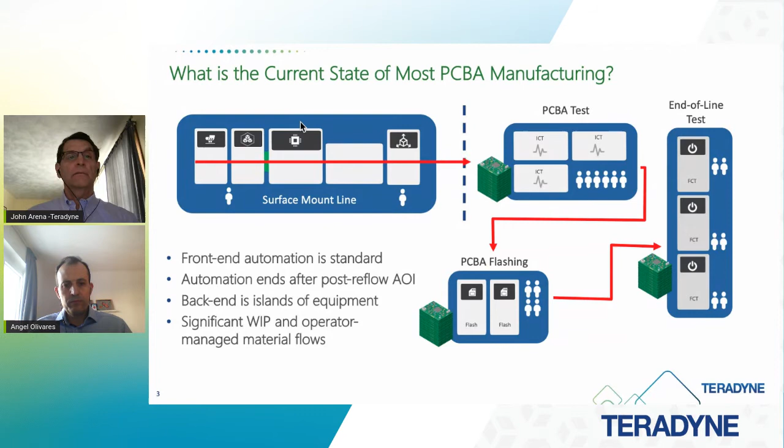The future state of productivity in PCBA manufacturing is to automate more of the back-end process, including the production test and the assembly stages that follow it, so that the entirety of the front end is largely on automation and largely without the need for constant human interaction. The function of the islands becomes integrated into the line. This, of course, is managed by line-to-line communication via SMEMA or other protocols, which I'll talk about in a moment.

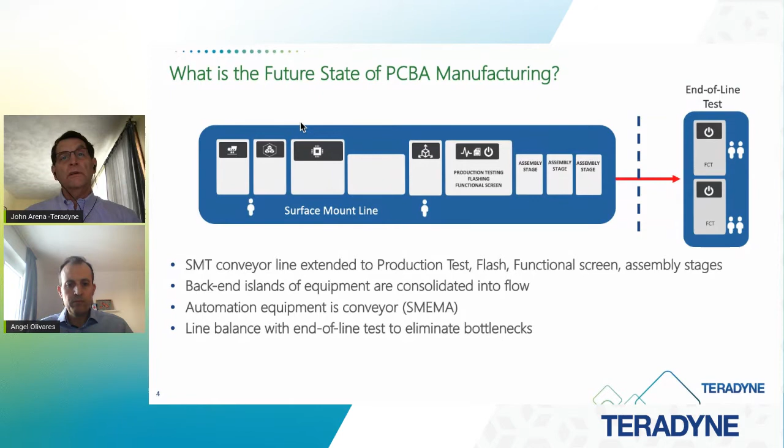And the other advantage of this is a better line balance. So when you have islands of productivity, each of those works at their own rate. It's very easy to create a bottleneck where one is slower than the other and you have work piling up. With the automated concept, the entire line is optimized for full productivity, guaranteeing more machine utilization, more units per hour.

So what I'd like to do is go through some of the observations we have made and some of the questions we receive when we talk to customers about this future vision of automation. The first is that, well, I have work cells, that's true. They work very well. Yeah, there are problems with people and work buffers and so forth. But that becomes very hard to automate. How do I possibly automate a work cell?

Well, the first is to realize that there are disadvantages to the work cell. You have the work being divided among multiple groups, and all of them must cooperate to get the units per hour. In addition, work cells are very manual centric. In each of those manual steps, whether it's equipment placement, tooling placement, board handling, barcoding, and so forth, all of those are done in series, and they all contribute to an increased takt time, the time per board, or the cycle time of the transaction.

The slower operator has a longer takt time, lower units per hour. So the focus of improving the work cell also goes to improving the overall operator investment in time by removing it. We remove the operator's contribution to takt time and thereby improve productivity.

And lastly, pardon me for the phone.

Lastly, each of the work cells has a buffer in front to guarantee that product is flowing nicely across each of the work cells. All of that can be eliminated in the automation stage, and that provides the increased units per hour and the increased productivity by assuring that there's no buildup of unprocessed customer equipment at any point in the flow.

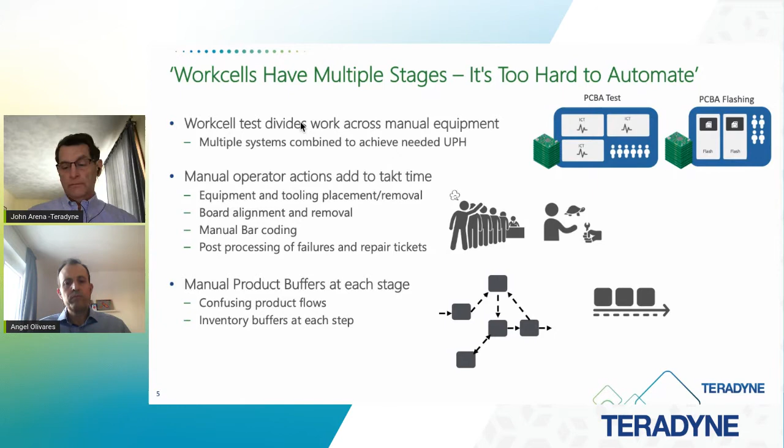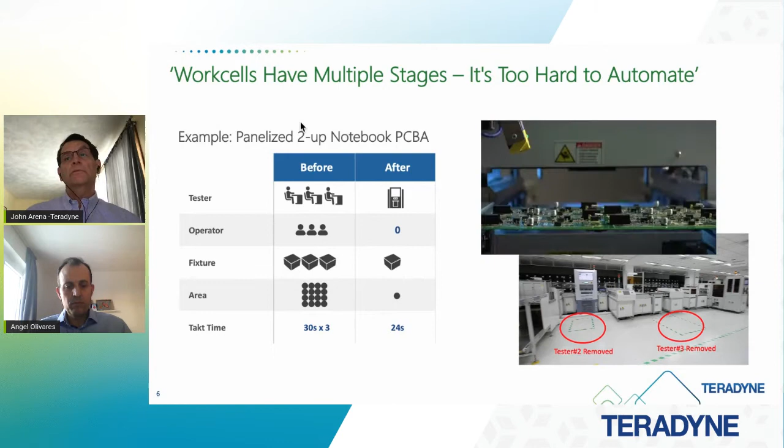Here's an example of such an improvement. So here we have a production environment. This is a real example. A customer previously had a work cell of 3 machines, was looking to add an additional machine to improve productivity of the work cell. And by putting a single automation system and the improvements I described earlier, we were able to duplicate the function of 3 testers with still some reserve, eliminate the number of operators, reduce the amount of tooling, and you see the reduction in work cell area.

This is a completely automated process, and the product flow continues into additional automated equipment that follows. By doing all this, we were still able to improve the takt time from a total of almost 90 seconds to 24 seconds. So the automation, the improvements I described earlier, dramatically improve the overall takt time of the process.

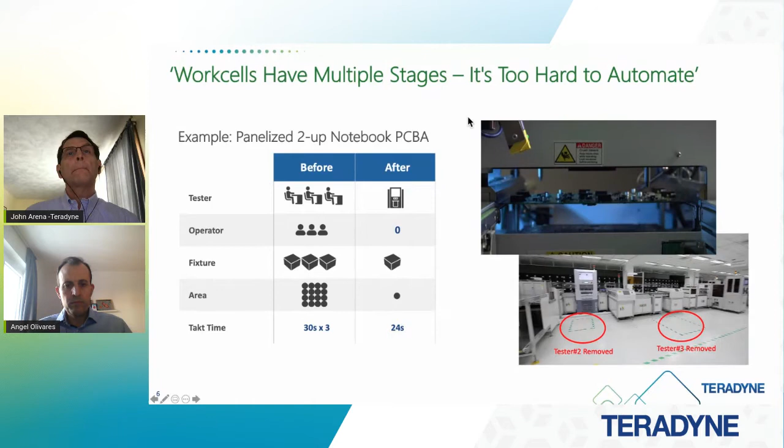A common complaint or a common observation is that the work cell processes are manual, and that includes manual documentation, paper, repair tags, and so forth. The manual system is storing test data locally. A printer is producing a kind of work ticket. This ticket is used by the next stage to inform them as to what steps to be done. There's some ability to recover that data by the operator, but it's cumbersome. And maybe some ability to report the defect data to the enterprise, but it's often one way. There's no way for the enterprise to then ask for changes in the way MES is recorded.

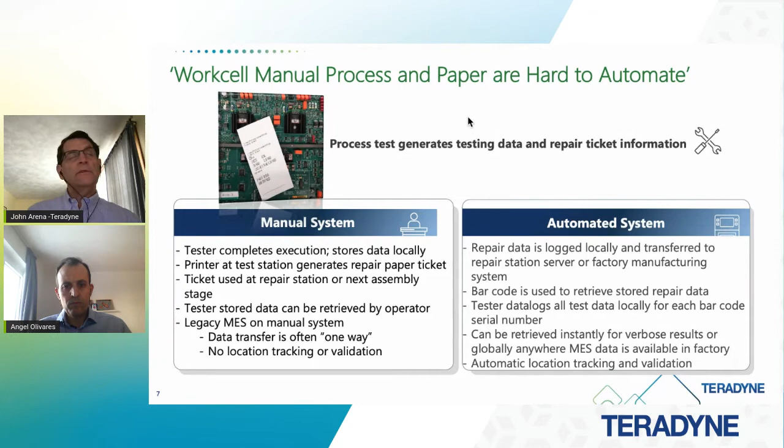The automated systems handle all of that paper process automatically without any need of the operator to go collect the data or print anything. It's all electronically transferred. All of the data is indexed by barcodes, so the repair information can be located by simply identifying the barcode of the product. Each of the verbose test results are available, and it can be located anywhere in the factory or the world. So you have automatic asset tracking for the repair process and production steps. These are commonly used functions today that exist without any special handling.

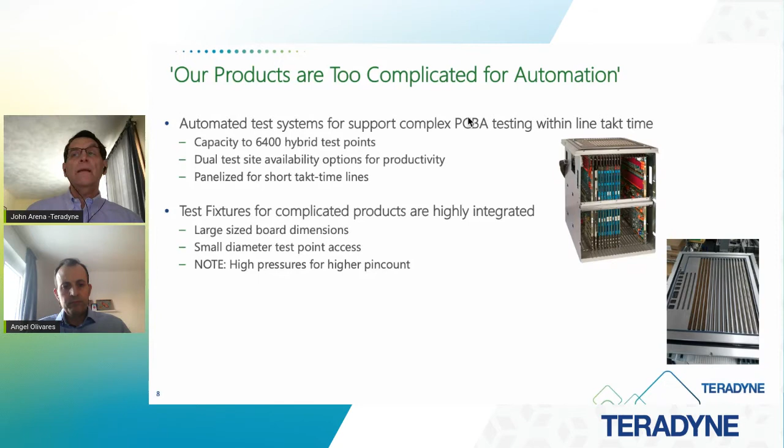Another common complaint is complexity. My product is very complex. It's not really an automation target. Well, these days, automation can extend well into 6,000 or greater number of test points. You have the ability to use multiple engines or multiple sites to produce even higher units per hour, focused on very short takt time products. And the concept of a test fixture has changed as well. They're far more integrated, far more capable than the test fixtures of even 5 or 10 years ago.

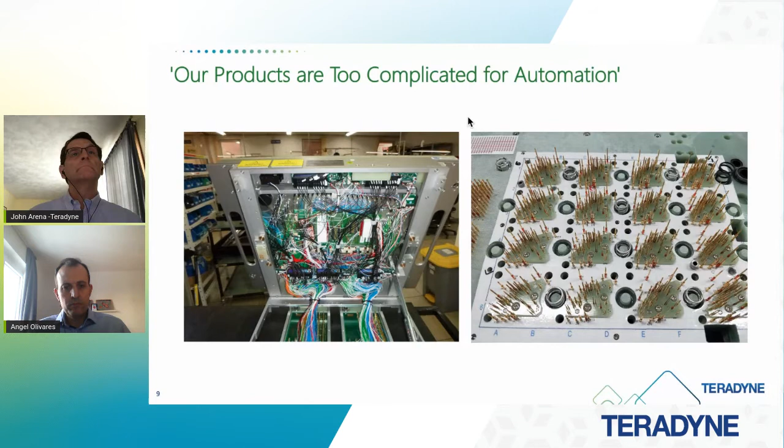We also get the opposite complaint. The products are too small. The volume is not great enough. It's high mix, low volume. It's not really an opportunity to talk about automation. Well, there are other alternatives besides a straight inline solution.

6-axis robots, automated robotics, are easily deployed for board handling. They can address the movement of an irregular product from the buffer to the tester and back. Modern testers have built-in robotics control so that the management of the robot, the location of the robot, the control of it is all managed by the tester. And these are, again, fairly common solutions now.

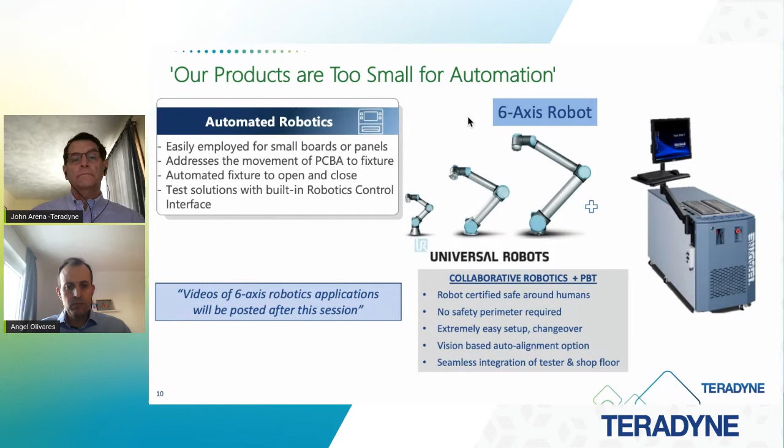The physical size of the product is often a complaint. The product is simply too large, it's too big, it's too wide. It's not uncommon to find automation solutions that can handle products that are 1/2 meter by 1/2 meter or even larger.

When you consider that such a fixture is big, of course, but it can also usually be smaller and lighter than a manual system, because the function of the manual fixture includes a press function, pneumatics or some sort of pressing. That is eliminated with an automated fixture. So the fixtures in that regard can be simplified. And there are several hundred examples of this kind of large board automation in the world today, both from Teradyne and our competitors. So board size is usually not an issue.

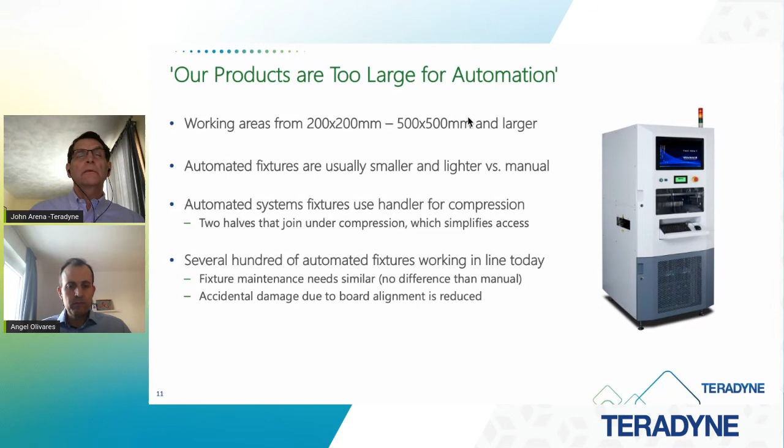As I mentioned earlier, there are many solutions in the world today, and the opportunity to pick automation as a component of the solution exists. So these are several vendors that Teradyne is familiar with working with commonly. You see the range from relatively small to relatively large. These are all examples of automation in which multiple kinds of testing, function test, flashing, full in-circuit test can all be performed quite easily, no matter what the product size. So the choice of automation can be optimized for the product, separate from the choice of test, and the two can be merged into a common platform.

Looking somewhat closer at the tester on the right of your screen, the larger product there with the Baumann name, this is actually a full multi-cell robotic controlled solution where product comes in on a conveyor. It is taken from the input conveyor. It is processed to one of 6 contacting stations where a variety of testing is processed. So these are 6 different or 4 different or 5 different kinds of value-added processing. And the product is moved from A to B to C as the test flow requires. But all of this is contained within a completely customized work cell that's targeted at this customer's application, all managed by a 6-axis robot at the core.

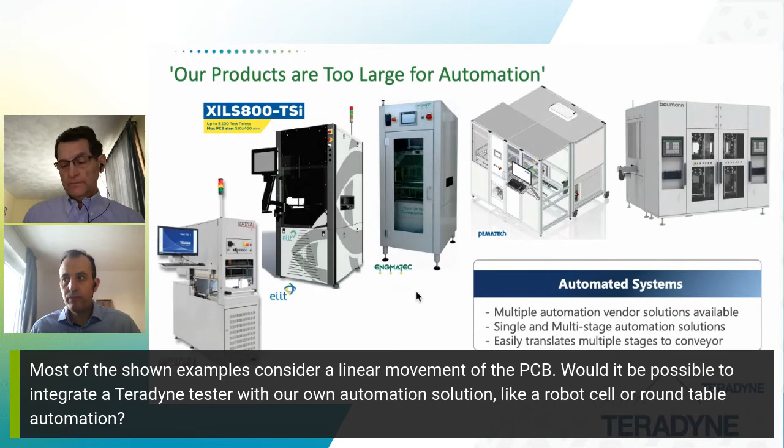Following this question, there is something related. Is it possible for Teradyne to upgrade existing obsolete test solutions that are integrated in an automation solution without replacing the whole automation solution or having to rebuild all fixtures? I think here they are referring to existing automation using other ICT suppliers that maybe are out of the market or they want to change for some reason, and customers are interested to reuse all the investment in fixtures.

Yeah, I did not bring slides to discuss this particularly, but usually that is the case for an older machine, an older test solution that is obsolete or not as productive as it should be. The Teradyne solution is extremely small. It can fit into just about every piece of automation, and because it is a full in-circuit test, it can usually duplicate entirely the testing function of earlier generation test solutions, no matter what the brand. So we have done this a couple of times now. This preserves the fixture. It preserves the test flow in the program. We will usually regenerate the program and match the test flow, but it's quite easy to do.

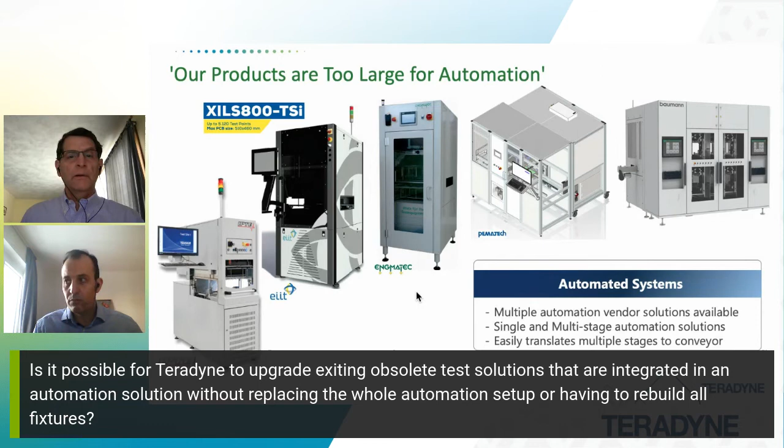Okay. Another question we get commonly is, how do I connect my automation solution to the enterprise? The work cell is hard enough to connect. How do I possibly connect the automation? Well, if you have a work cell based solution, you realize you're dealing with, as I said earlier, usually a printer output or maybe a local kind of data log file that has to be post-processed to connect to the enterprise. These post-processing tools are not standard.

They must be developed. There's generally not a way to connect the work cell to other machines in the line for machine-to-machine communication. There's very little real-time control usually available, and there's no way to record the calibration or maintenance state of the manual system in an automated way.

The modern automation systems have built-in capability to communicate the control, allow control of the machine, communicate the status of the machine, or to report the test results or calibration results. It's natural for the automated machine to provide this data because we don't have an operator standing by. So all of this capability is produced for the enterprise to monitor.

These are usually available as standard plugins or even product that we have on the shelf. You have the ability to monitor temperature, hours of operation, calibration status, anywhere in the enterprise. And this is real-time information that is produced second by second on the machine.

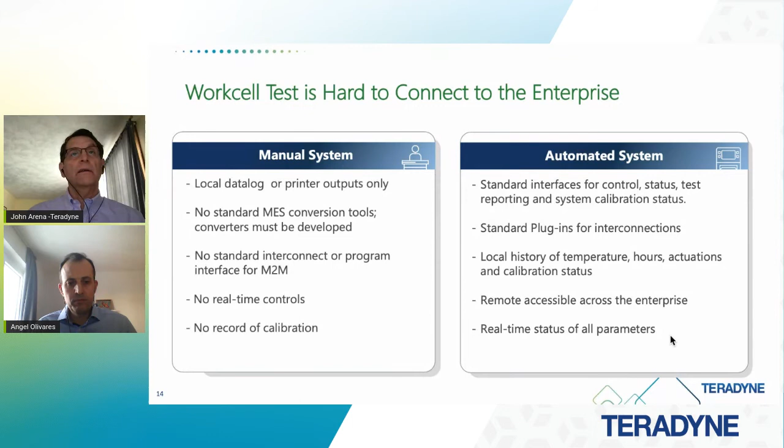One example of that is a product that we are rolling out now. We call it Smart4Metrics. Here we have a way to connect all of the machines on the floor via both an operator interface to interrogate the machine for its current state, its current calibration, its current production status, as well as connect real-time those machines to

implement machine-to-machine communication. So we have both a real-time interface and the web interface for the operator to provide that functionality. And these are developed to work with almost any existing connection on the line. We use a series of standard tools that we've developed as well as plugins that can be developed for proprietary interfaces. In this way, the machine is made to be completely in control of the factory and completely aware to the enterprise.

Sorry, John, I have another question here. Yes. Does Teradyne already have a solution to integrate the software with MES systems like ITAC, SAP, or new standards like IPC-CFX? Yeah, good question.

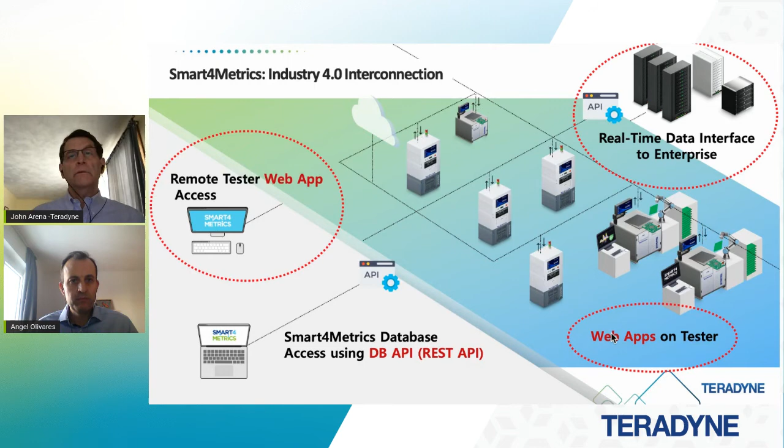So ITAC and other MES standards, historical standards, have for a long time been supported by custom solutions. Teradyne is still supporting these, but for new functions like IPC-CFX or Hermes, we are moving to this kind of plug-in concept where we have a standard interface on the testers, a series of plugins that are pre-written that integrate the tester to the desired MES system. So it's not a problem at all.

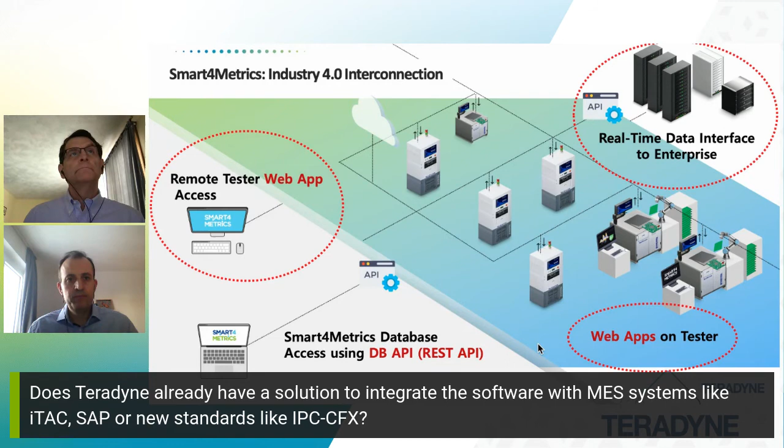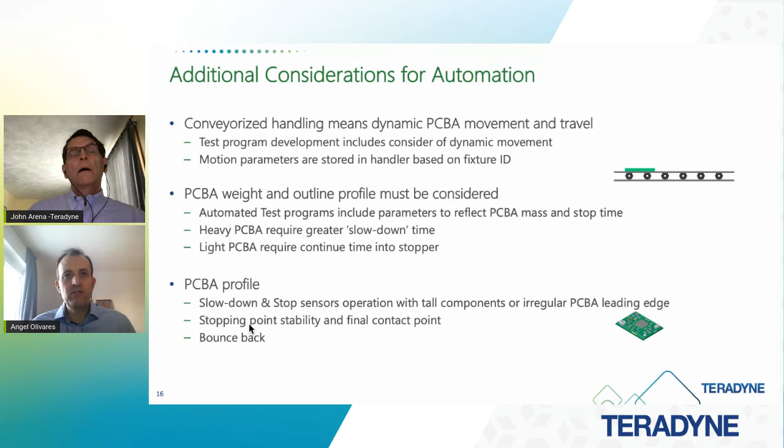John, I have another question related to the automated systems here. What about the maintainability of these automated systems? We have experienced that maintaining integrated solutions causes longer downtimes due to the relatively bad access to its integrated components. That's a great question.

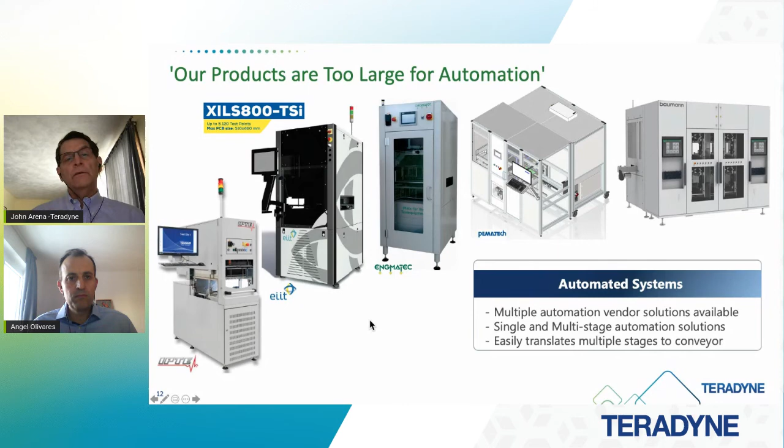So many of the test equipments developed today were produced years ago, decades ago, and they were not designed for automation. Our modern solutions from Teradyne are designed for easy maintenance. So even if it's in third-party automation, Teradyne always adheres to one principle on maintenance. It should be quick and it should be accessed without special tooling.

So whether it's any of these vendors, by accessing the front and the back covers only, a card can usually be replaced in a few minutes' time, or a power supply in a few minutes' time. Without any special tooling, without any requirement to remove the test head from the automation. This is not possible with machines that were designed decades ago, around a different maintenance principle. So we always focus on maintainability.

Even though the machines are extremely reliable, there are cases where in production environments you do see a defect, maybe 1-2 a year. Then you should have very quick time to return to service. So we want to be able to identify the defect, remove the defective component, and then restore the machine to service. All of that is a focus of our test engines, no matter what the automation solution.

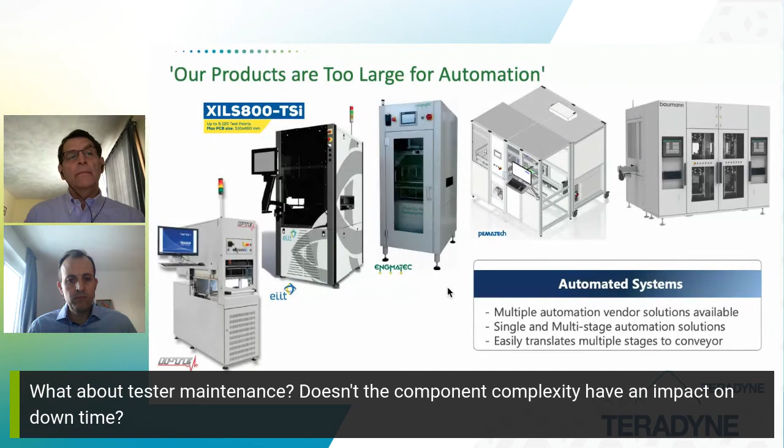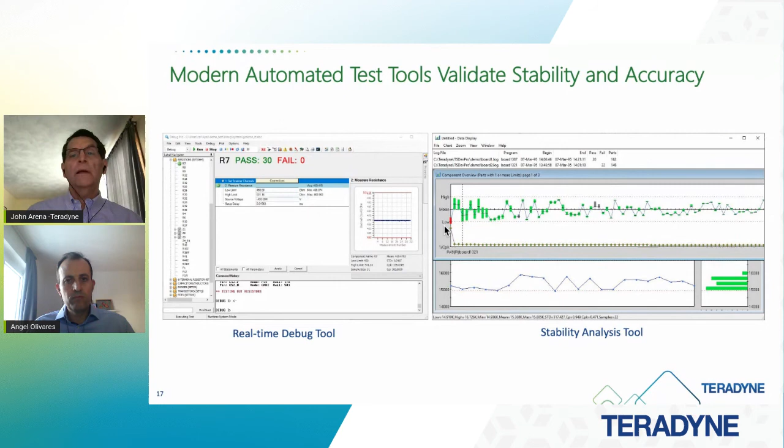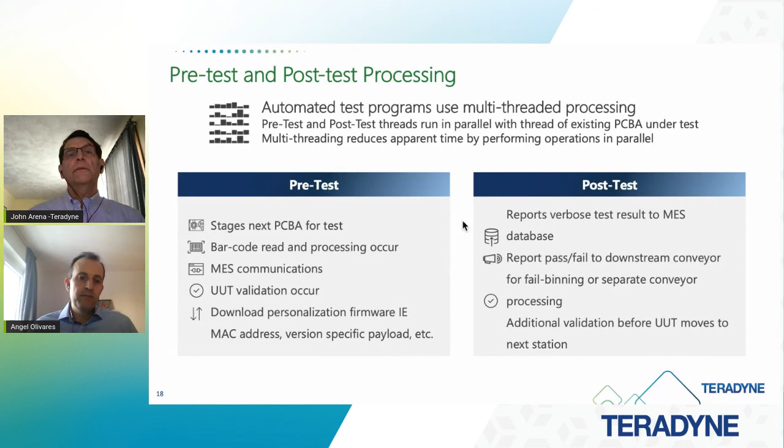John, I see another question. Is it possible to use this pre-test and post-test option in an existing Teradyne offline tester? It is possible to do the pre-test and post-test processing. So in this case, the operator would be testing board A, but A+1, the next board, he's doing some pre-test processing on. The tools exist.

The question is always the stability of the operator, because now you have 2 or 3 boards the operator is handling at the same time. The next board, the last board. So you have the opportunity for confusion. So technically, it's not an issue. The issue is really the stability and reliability of the operator to understand what he is doing. And that is really the challenge. Yeah, maybe using a cobot could solve this problem. Yes, yep.

That is the presentation for today. Our goal is really to expose the listeners to some common questions about automation and common answers to these kinds of questions that have been developed for earlier applications.